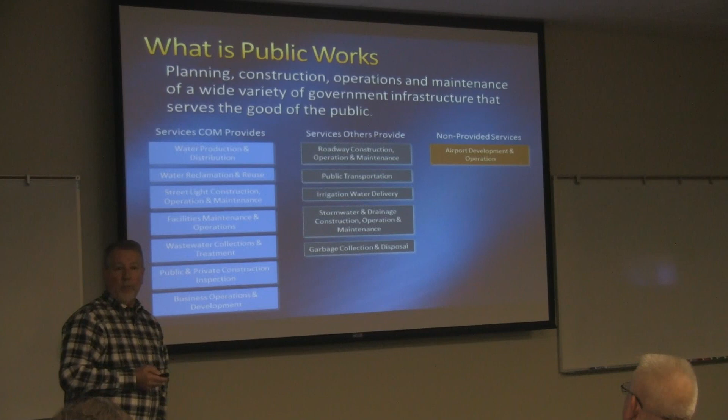In Ada County, we have a highway district that manages the roads. The Idaho Department of Transportation owns the highways and freeways, so we do not do that. We do not have an irrigation system—that's traditionally provided by irrigation agencies like Nampa Meridian Irrigation District, maybe Settlers or Pioneer. ACHD and ITD are responsible for stormwater in our community, so we don't have that. And as mentioned, the garbage collection. We also don't have an airport, but a lot of cities do. These are traditional public works responsibilities throughout the country.

Although we don't do those, we do a lot of coordination with the other agencies. In fact, we get a lot of calls and we want to assist citizens in getting them directed to the right agencies—highways, irrigation, public transportation, hazardous waste, school, animal control. We will happily direct you to those other services if we get those calls. Particularly as new members join our community from other areas, we may not offer the services they're traditionally used to. So a little bit about our department.

Here is a functional view of Public Works organization: policy management, performance management in the administration areas, our business operations team, which includes our environmental programs, all of the financial management, asset management, asset tracking—Alex will be able to share more of that with you. And then we have the responsibility of managing the facilities, like the one you're sitting in here. Any maintenance, repair, or upgrade needs, that responsibility falls within Public Works as well.

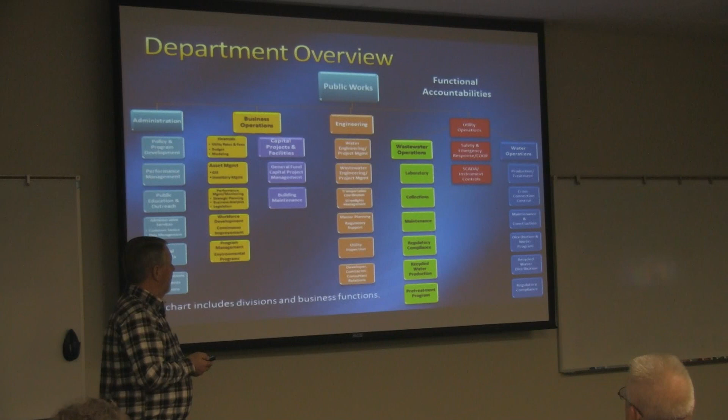In engineering, we have a wonderful staff of engineers designing, building, and managing infrastructure improvements both in our water and wastewater utilities, coordinating with transportation through ACHD and ITD, and master planning—looking out 10, 20, 30 years at how our city is growing and how we'll make sure we have those services available. That's all part of the engineering group. And then obviously our utility operations, which manages all of the day-to-day operations associated with delivering water to our city and sewer or wastewater back to the sewer facility.

So we have some unique demands on our time and expectations by the community. Certainly we are full-time—we do not stop 24/7. We need water delivered and we need sewer coming back, so we have to staff and manage accordingly. We have very expensive assets, probably now in the order of $400 to $500 million worth of assets throughout the city, serving you as wells and wastewater treatment plants, but also the tremendous amount of infrastructure in distribution of those services. So, very complex system, highly regulated, as it should be.

EPA, DEQ kind of define those requirements, ensuring that we are delivering safe products through our water and safe handling of wastewater. So very highly regulated. Our budget—about half of what the city receives comes to the Public Works Department. We'll talk a little bit more about that. As I mentioned, we have 107 FTEs, which puts us as the largest department in the city, and a very diverse and complex discipline. We have everything from engineers to scientists to administration to chemists to structural folks—it covers the gamut in terms of the professional disciplines, education, and training required to support operations like we have.

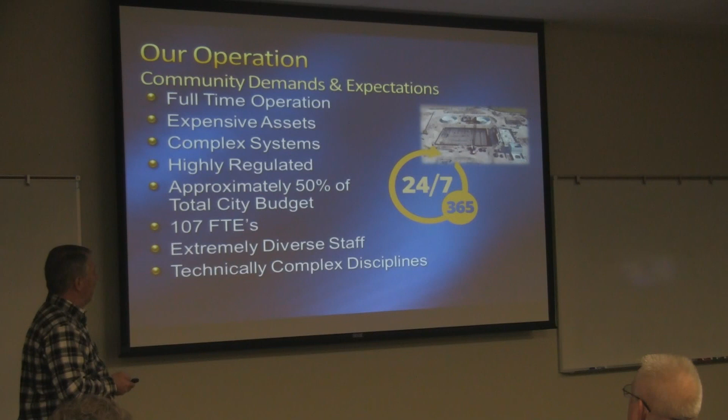Our source of funding comes from the enterprise fund, and that is in contrast to the general fund. Most of the other things you hear about within the city, fire, police, parks, all of that, those are general fund kinds of funded items. We live from the enterprise fund.

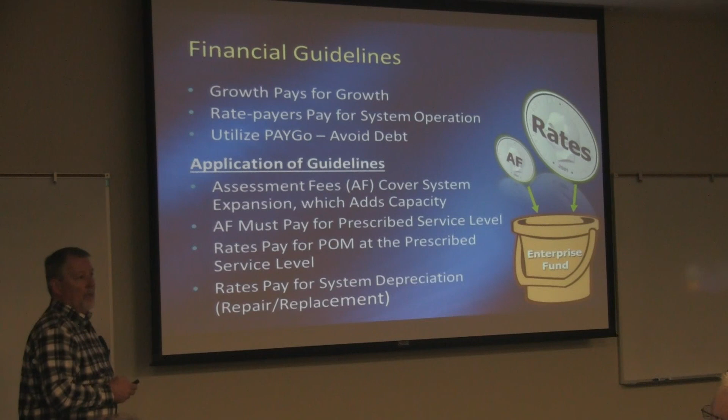With that, I'm going to stop and turn it over to Alex. We're going to walk through these basic divisions within our department and allow them to share the importance they contribute to the community. Thank you, Dale.

Good morning, everyone. My name is Alex Freitag. I am the manager of the business division in Public Works, and this is the team I have the privilege of working with. They're excellent in everything they do. As Dale mentioned, the business division is really there to support our utilities and engineering functions.

We run very much like a private sector business. The Public Works Department has its own revenue source. We provide a commodity to our customers. The ratepayers are our customers, and so we're able to operate very similar to the way a private sector business operates. My division handles a lot of those ancillary duties important to that. Dale talked about the financial piece of it.

We handle the budget for our entire department, which is in excess this year of $50 million, roughly about 50% of the overall city budget. We shepherd our entire group through the budget process, all of our divisions, through that planning process. It takes us probably about 6 months to go through the entire process from start to finish. The budgeting process is extensive.

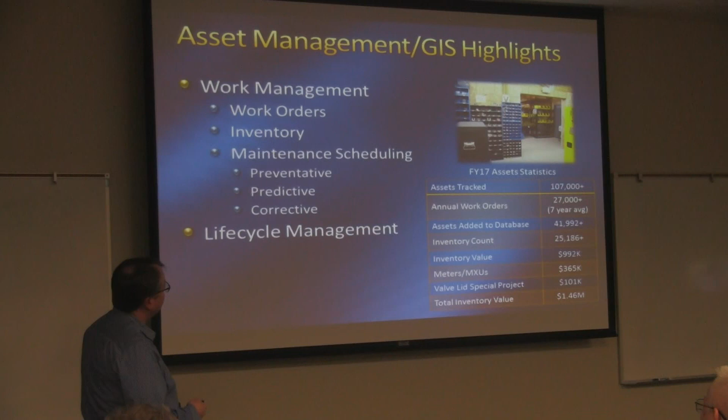The interesting thing about asset management is we've really only had a robust asset management plan in place for about 10 years. And as you can imagine, we've been putting infrastructure in the city for well over 100 years. So part of what they do is go back, capturing a lot of that stuff that was never categorized in the early days, and keeping up with the growth we have now. But yeah, we have some very old pipe in the ground, there's no question about that.

The final group I'll talk about for the Business Division is our capital projects and facilities team. In addition to all the work the Public Works group does with utilities and engineering, we are also responsible for the city facilities. Right now there's a team of 3 people that manage all 12 of those buildings, over 280,000 square feet. They do all the maintenance, the repairs, and a great chunk of the improvements, with just those 3 people handling that. There's one additional person, our capital projects person, who helps us with project management when we build new structures for the city and so on. So that's a busy group, I can tell you, they're always doing a lot of stuff.

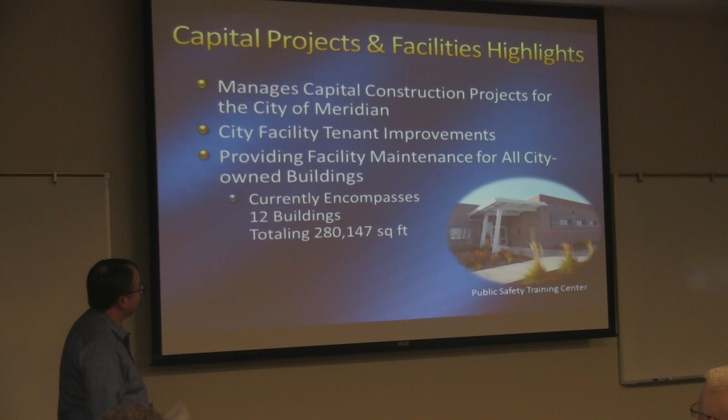So that's a quick, high-level look at the business division. And with that, I'll turn it over to Warren Stewart, our city engineer, and he's going to talk a bit about engineering.

So, excuse me, I have a cold, so if I'm a little froggy, excuse me. I'm going to talk briefly about some of the things that the engineering division, as well as the construction and inspection divisions, are responsible for, and highlight some of the projects we're currently doing.

One of the main things the engineering division gets heavily involved in, which has been mentioned already, is the long and short-term planning for the city of Meridian's utility infrastructure — that's water, sewer, recycled water, as well as, to some degree, transportation. As many of you may know, we don't have direct responsibility for the transportation infrastructure in the city of Meridian. We do have a liaison for the Public Works Department who advocates with ITD and ACHD to try and get the things the city would like to see incorporated into their projects, and to influence timing and so forth. But we don't have direct responsibility for that.

So a lot of this long-term planning, there are about 7 long-term master plans that we try and keep updated. About every 5 years we review and update those. A lot of the work regards water and wastewater and various aspects of that, from communication systems that allow us to remotely operate facilities, to the collection systems, distribution systems, and wastewater treatment plant.

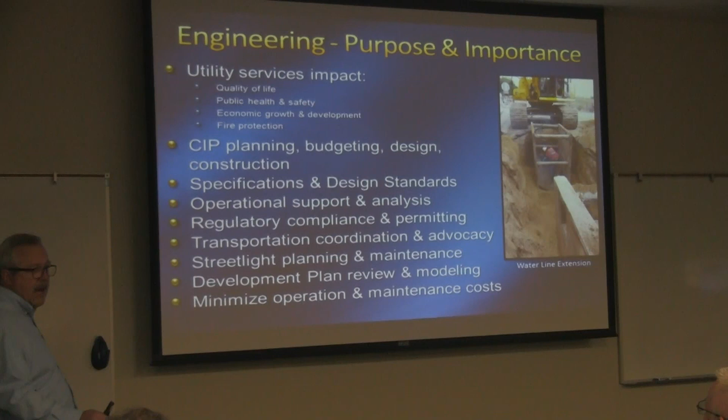The quality of our water and wastewater infrastructure directly impacts the quality of life of our citizens. It also has a significant impact on public health and safety, as well as our economic growth and development. The city has been growing, recognized several times as one of the fastest growing cities not only in the state of Idaho, but in the nation. So it's important that we keep ahead of that and make sure the quality of your water systems allows a high standard of life, while giving us the ability to accommodate growth and development.

One of the other things we try to look at regularly is regulatory compliance and permitting. Lorelei is responsible for the operational control of the NPDES permits, the EPA permits, and so forth that we have for our wastewater systems. But as the engineering division, we're constantly looking at the new regulatory landscape that's upcoming, as well as the existing regulatory landscape, and trying to anticipate those needs.

One reason we do that is to make sure that when we invest in new projects, we're not only trying to meet the immediate needs that are required, but looking out to address emerging needs, so that the infrastructure we put in the ground and the investments we make don't become prematurely obsolete, so they can serve us long term.

Again, I apologize. I get short of breath because I have a hard time breathing.

One of the other things we do in the engineering division is model all the new developments that come in. Anytime a new development comes into the city of Meridian, we run hydraulic models, which is a computer simulation of the water and wastewater systems they're proposing, to make sure we have adequate capacity. That also allows us the opportunity to place conditions of approval on these facilities or new developments that will ensure they build the infrastructure necessary and make the investments needed to support themselves.

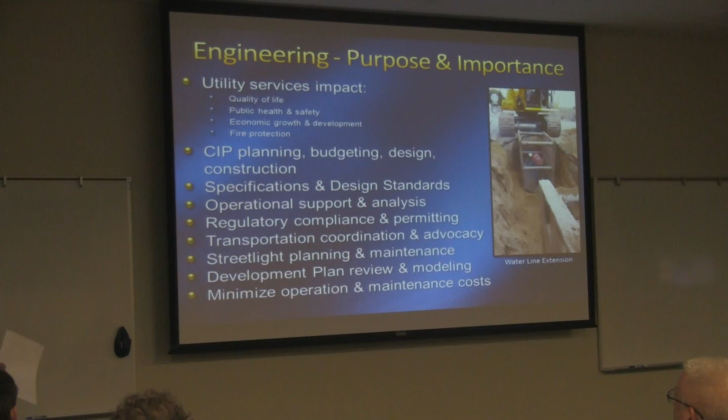One of the other things we look at a lot is a process where we're constantly looking at ways to improve efficiency in our operations, so that we can make sure all the investments we make make long-term financial sense for the city, and that we're doing that in the most cost-efficient method.

The other aspect I help oversee is the construction inspection piece of this. We have a group of inspectors that I oversee that inspects the utility infrastructure that goes in the ground. We have other inspectors that do electrical and plumbing and those kinds of things that work with the city, but we have a group dedicated to inspecting the water and wastewater facilities that go in the ground—not only the ones the city of Meridian puts in, but also all the infrastructure built by private developers, both commercial and residential, that ultimately comes to the city of Meridian for operation and ownership. The inspectors actually look at every project that goes in the ground.

They, however, aren't there all the time. There's so much work going on in the city of Meridian, and we have just a few inspectors who have to visit projects throughout the day, so they're not on a project all the time. But because they visit these projects regularly, it helps make sure the city's standards and specifications, as well as the state standards and specifications, are followed. We don't get to see them all the time, but I like to compare this simply to what police officers do.

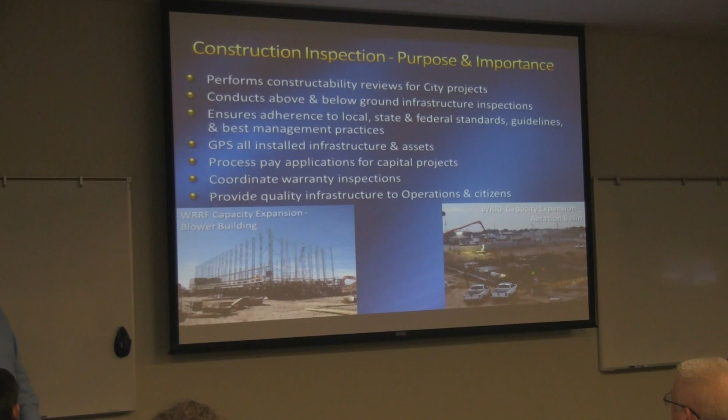They also help our engineering staff process pay applications for the contracts we're directly responsible for. We have a 2-year warranty program in the city of Meridian, so any new infrastructure that goes in the ground is required to have a 2-year warranty. They're also responsible for the 18-month inspection required on that warranty, making sure it gets done, and if corrections are needed, working with the contractor to make sure those corrections are taken care of. They're directly involved in making sure the quality of the infrastructure that goes into the ground is top-notch, so it has the longest life cycle possible.

I'll take just a few moments now to talk about some of the projects we have going on, and give you a sense of the scale.

The WRRF capacity expansion project—WRRF stands for Wastewater Resource Recovery Facility—is the largest project the city has ever done. We're essentially taking our existing treatment plant, rated at about 10 million gallons a day of capacity, and building onto it to raise that capacity to just over 15 million gallons a day, so we can accommodate the growth that's happening. But it's not only accommodating growth—it's also going to help us meet the new regulatory compliance issues and concerns coming to us in our new permits.

The next project is the Headworks reconstruction project. The Headworks is essentially the first piece of infrastructure the wastewater flows into at the plant. It has screens that screen out the most coarse things in the waste stream, and pumps that elevate the fluid to the clarifiers and other components inside the treatment plant. We're rebuilding it because it needs an upgrade for capacity, and we're also upgrading it so we can enclose it and recirculate the air through a filter to reduce the smell in the wastewater treatment plant, since the headworks is one of the largest contributors to that smell.

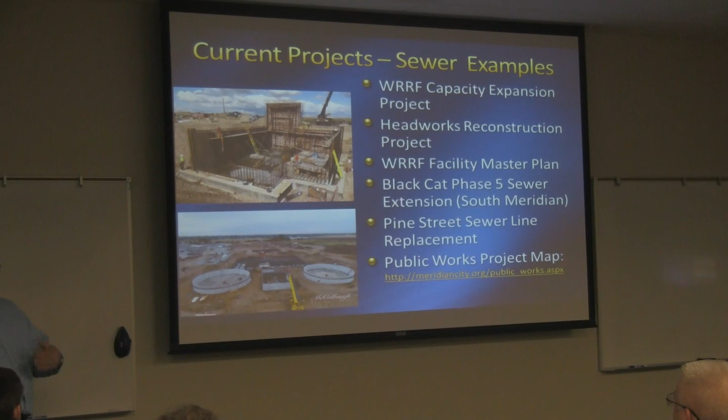Pine Street is a joint project with ACHD. They're widening Pine Street, and we team up with ACHD as often as we can on these projects because it saves citizens money—we don't have to pay for road repair since ACHD is already redoing the road. So we replace our infrastructure if it's old and needing replaced, at the same time ACHD does these roadway projects. We're replacing water and sewer line in conjunction with the Pine Street project to save citizens money and repair some of the aging infrastructure there.

The Public Works project mapping shown at the bottom highlights that Susie talked to our city council last night about a new tool on our website—an interactive map you can click on. It shows all the projects currently active as well as future projects. You can click on them to get information, and you can even search by neighborhood, so if you want to see what projects are going on in the city of Meridian, that's a place you can do that.

Finally, I'll talk about some of the water projects. We're currently reconstructing Well 15. One challenge here in the city of Meridian is that we have a prolific aquifer, but it has lots of sub-aquifers—a layer of gravels with a lot of water, then a layer of clay, then another layer of gravel and clay. Each of those little aquifers has very different water chemistry. As we go down from one aquifer to another, we're trying to find the areas with the best water chemistry—the upper aquifer has certain challenges, the lower aquifers have different challenges, but we're trying to find that sweet spot.

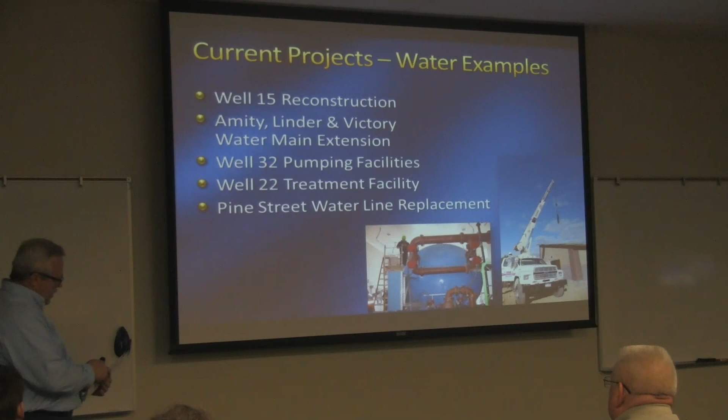I just got you some water. Thank you. Oh, okay, thank you. I know, I'm kind of nervous about touching this. Sorry.

Well, you guys are sure troopers. I know you've sat through a lot of information, so I appreciate it, and hopefully we'll make this section pretty exciting. I get excited about it.

The people that run these two groups that provide the water and sewer are some really, really great people that work really hard day in and day out.

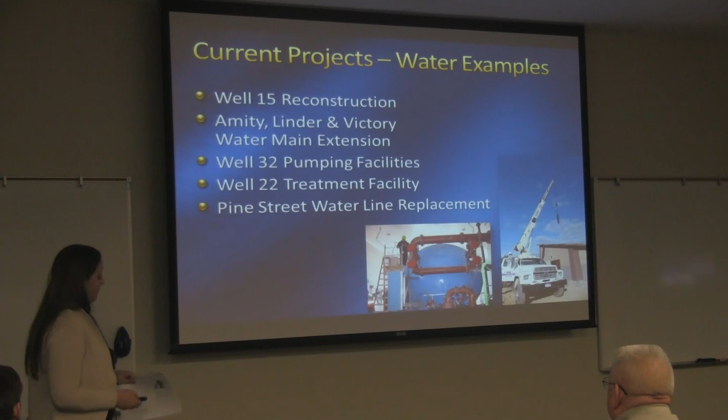Okay, so to kick it off, because everybody likes videos, I have some videos that we developed that kind of explain what water and wastewater is. These are really great if you have little kids at home or grandkids and they want to know about the water system. So these are available on our website too. So we'll kick it off with these.

Son, you showered yet? Come on, sis. Come on, hurry up. Dad wants me to get going. Hey, do you know where Meridian's water comes from?

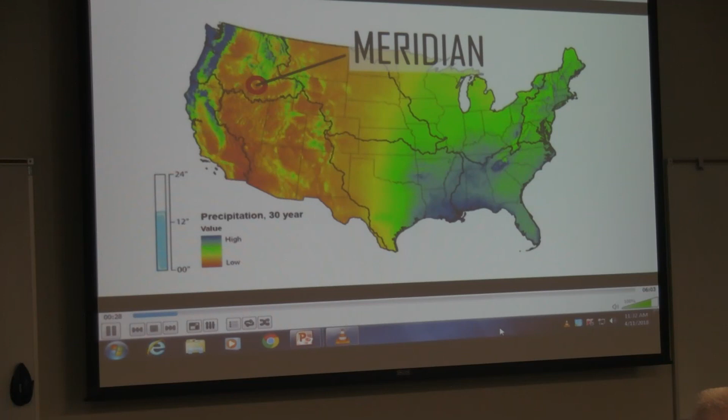Doesn't our water come from rain and snow? Yeah, rain and snow. Well, kind of. The city of Meridian has a dry climate. We only get about 14 inches of rain a year. However, snow in the nearby mountains melts and flows into our rivers and streams. From there, the water seeps deep into the ground into what's called an aquifer.

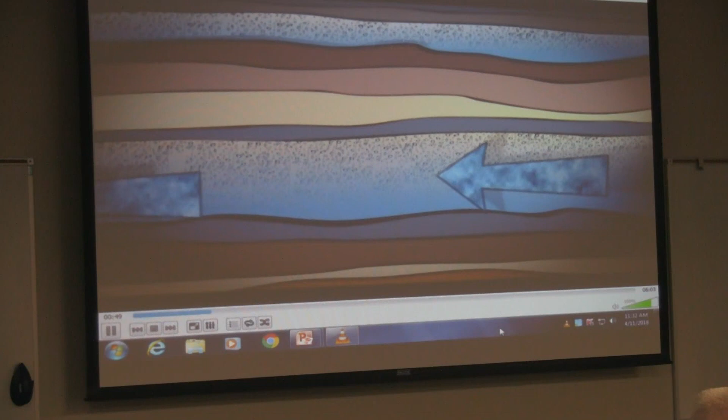What's an aquifer? An aquifer is a geological formation of permeable rock, gravel, or sand that contains water deep underground and flows like a slow underground river. Fortunately, beneath the city of Meridian, there are several aquifers that supply water for our residents.

What? So there's more than one aquifer? And they're deep in the ground? So how do we get our water out? By drilling wells. Deciding where to drill and how deep to drill is really important.

Different aquifers are at different depths and have different water quality depending on the geological formation they're in. The city's water division conducts well testing to find the best location to drill a well and to test the groundwater quality that comes from each well. The wells have to pass a test? Not like that, silly. Like this.

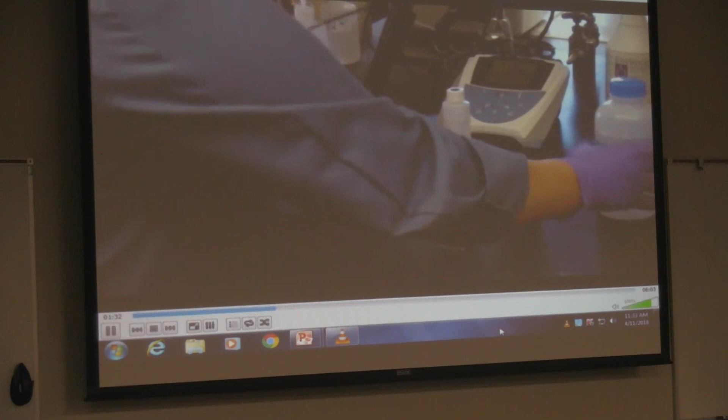When a test well indicates sufficient flow and high water quality, we put in what we call a production well. This well produces drinking water to our homes, schools, and businesses.

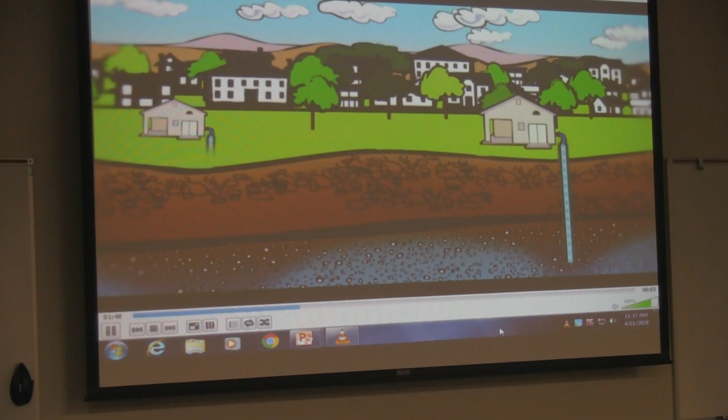You know, we're really lucky in Meridian because our aquifer has really good water quality. And as a result, we don't have to treat it as much as we would, say, if we drew our water from local rivers. So, my friend who lives on the other side of town, she drinks the same water I do?

Not necessarily. There are 20 active wells located all around Meridian. Each well services different zones in our city. Your neighborhood might get its water from a well in one zone, and your friend from a well in another zone. Hey, my boss complained to me the other day about his water being a little brown last week. What's up with that?

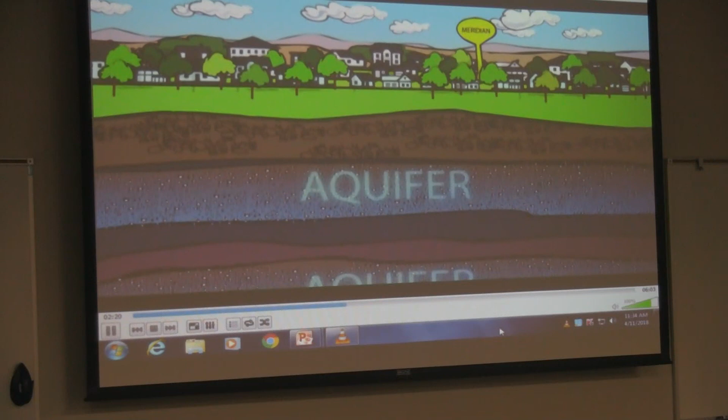Different aquifers have different levels of naturally occurring minerals, such as iron and manganese. Occasionally, you may notice that your water is slightly discolored in appearance.

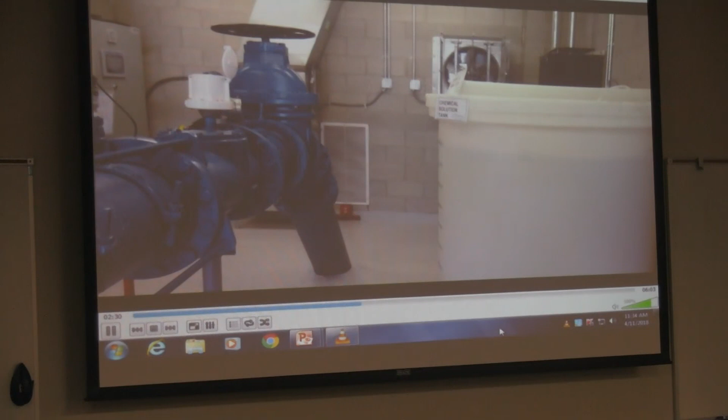Meridian's water division adds a small amount of chlorine to disinfect all the drinking water we produce. When the chlorine mixes with water containing certain minerals, a chemical reaction causes them to oxidize, become heavier, and settle to the bottom of water lines. During times of high water demand, such as mornings and evenings, this mineral buildup gets picked up and mixed back into the water flow, causing the water to appear brown in color.

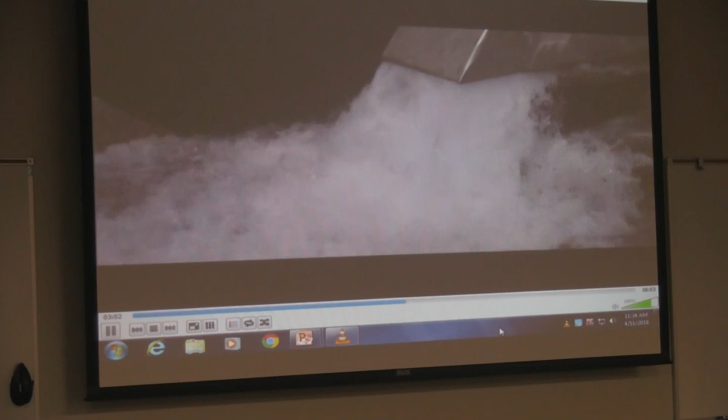The water division operates a year-round flushing program to help clear out the buildup of iron and manganese. The city is also pursuing long-term solutions by constructing new water filtration facilities, which will reduce these harmless minerals and help keep our drinking water clear.

A portion of the drinking water also goes to storage tanks or reservoirs for future use in emergencies.

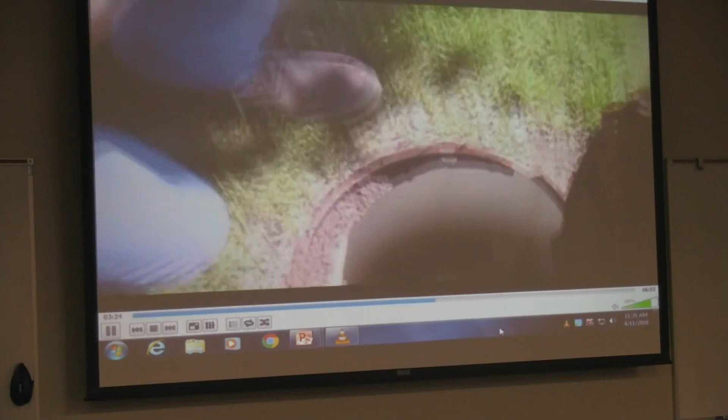Since water meters were first installed, the city has collected data about how much water your home uses. But how we collect data has evolved over time. With the help of laptops and wireless technology, we now drive through neighborhoods and get hundreds of meter readings at a time. This is one way the city is improving efficiency and saving money. Decades of collecting water usage data has enabled the city to see trends in consumption over the years.

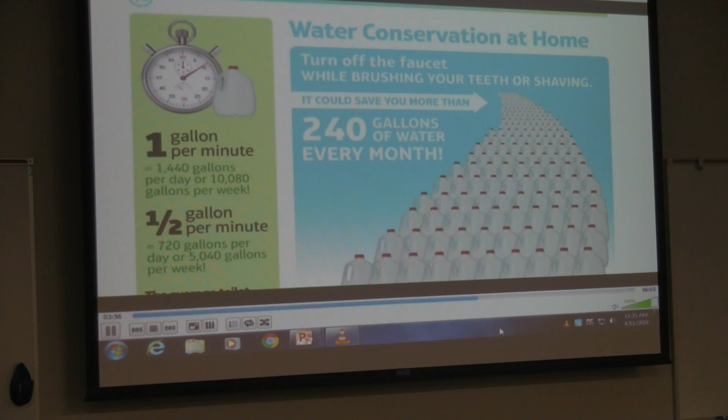Hey, turn off the water while you're doing that. Oh no! That was a good example. Let's look at some others.

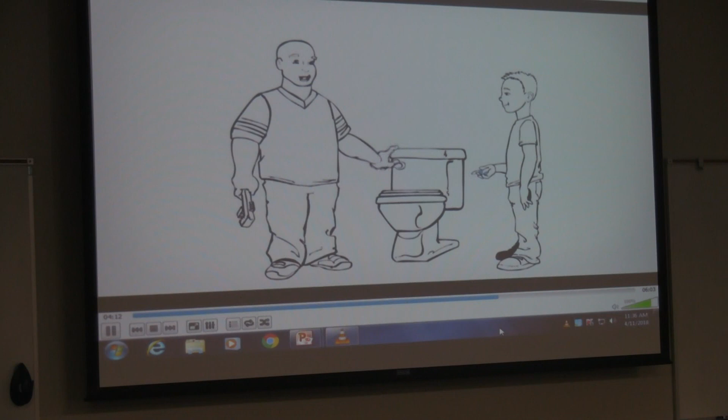Thanks for helping me fix the leaky toilets out. Hey, let's use the blue tablets on the other toilets to see if they leak too. Sure was nice of the city to give these to us for free. That keeps us from wasting water and saves us money. This low-flow faucet will help reduce how much water you use too. That's right, changing this out was a great suggestion.

When you're out enjoying Meridian's parks, make use of our filling stations with a reusable bottle. There's a lot of ways to conserve water. Here are some suggestions.

You know what, Dad? Let me sweep the driveway off instead of hosing it off with the city water. We don't want all the oily gunk getting into the aquifer. Good thinking, buddy. It's pretty easy to protect our water quality once we start thinking about it. Little actions make a big difference.

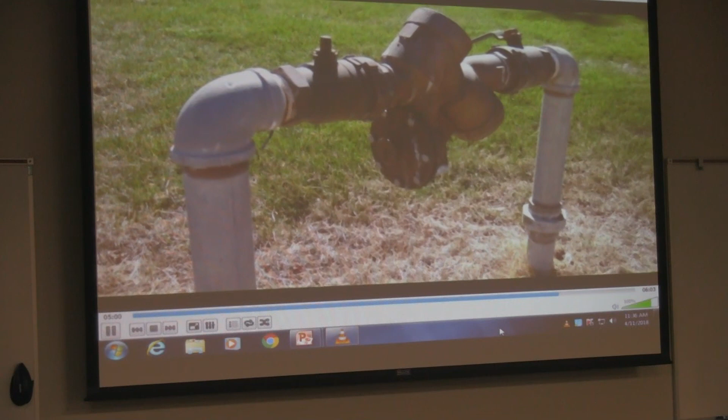Help us protect and conserve Meridian's water by installing backflow prevention devices, properly disposing of household hazardous waste, and picking up pet waste. Did you know taking shorter showers can save hundreds of gallons of water?

But I think I could take shorter showers once in a while. Here's the timer. Let's see how long you take. Ha! I don't need to take a shower. Yes, you do.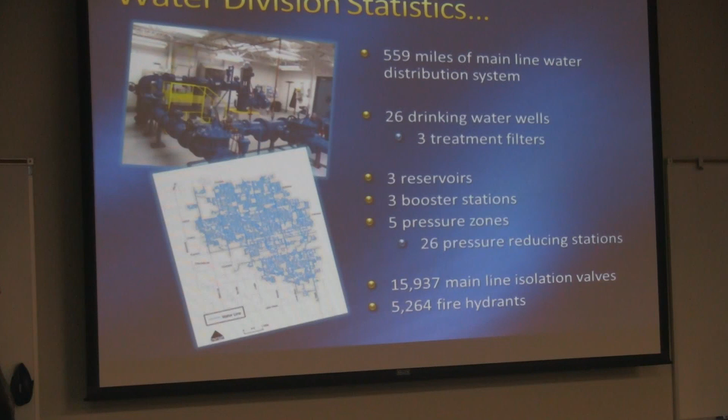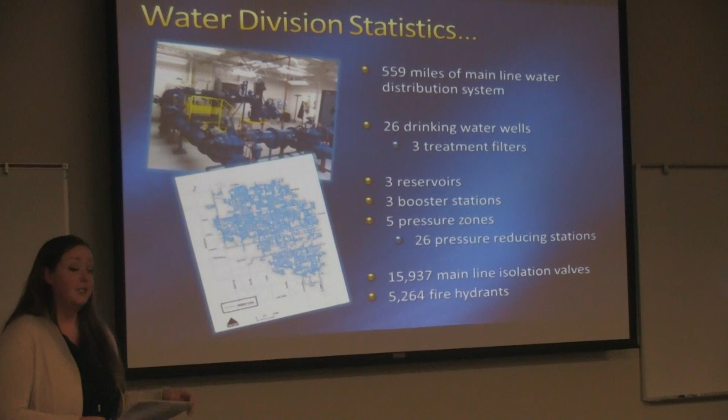Okay, perfect. So that was a great video that kind of showed you where we get our water from. But then our next big job is, like Warren talked about, pumping the water up from the aquifer and then distributing it to all houses in Meridian. So we have over 550 miles of water line that we're responsible for.

Since that video, this shows you how fast Meridian's growing. It said we have 20 wells, we're actually up to 26 wells now, and 3 of those have those treatment facilities that Warren spoke about that help remove that discoloration. We have 3 reservoirs that store the water.

One of the big jobs that we do is we have to have enough water demand so that when everybody wakes up in the morning, the faucets all turn on at the same pressure, and when everybody gets home from work, the faucets turn on. But also, if there were a fire to happen during that time, we have to make sure we have enough water to also be able to open a hydrant and provide water for that fire. So some of these big reservoirs, the water tower, there's one at Settlers Park, a big above ground tank, those help us store water for those high peak demands.

We have almost 16,000 isolation valves. So when you drive down the street, you'll see two things that are ours. You'll see kind of big manholes that are like the size of an extra large pizza - those are for the sewer system. You'll also see some that are about this big that are for the water system. So next time you drive down the road, just keep an eye out for those.

Each time the sewer or water main lines change direction, we have one of those valves at our manholes so that we can have some control over where the water is going. A good example: you may have heard in the news when we accidentally shut down Eagle Road a little bit ago. Sorry. But one of the great things is because of all of those isolation valves, we didn't have a single customer out of water for that whole event because we were able to shut those off and just take care of that problem right there. So a big part of our job is maintaining all of those valves and fire hydrants around the city.

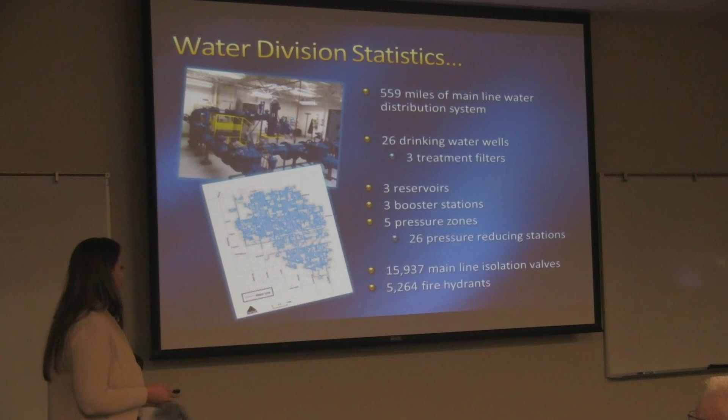Geez, I'm not good at this.

So the fire hydrants are supplied by just regular drinking water? They are, yeah. Our biggest goal in the water department is to provide safe, healthy drinking water to the citizens for use, but also for fire protection, which we talked about. As Dale mentioned, we are very, very highly regulated, so we do testing all the time to ensure that our water meets federal and state requirements.

And to do that, we also have, the video talked a little bit about backflow preventers. What that is: when your water system is connected to a different type of water, like maybe irrigation, we want to make sure there's absolutely no way that irrigation water could get back into the drinking water. So you have to put one of those backflow devices in, which is essentially a one-way thing, so it can only go one way and we're protected from the other sources of water.

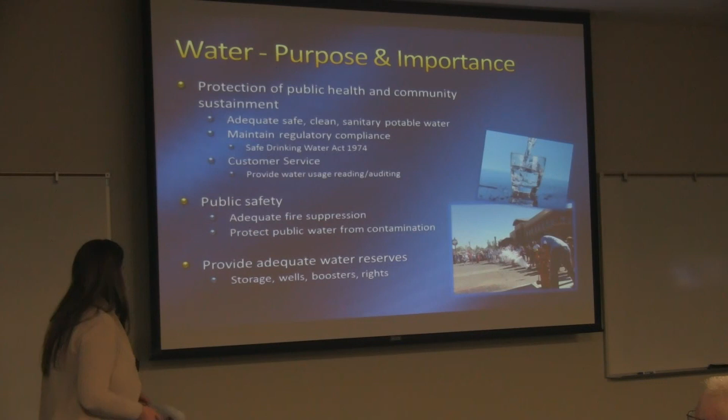Our water division has 26 employees, broken into 4 different sections. These guys are led by our water superintendent, Dennis Teller.

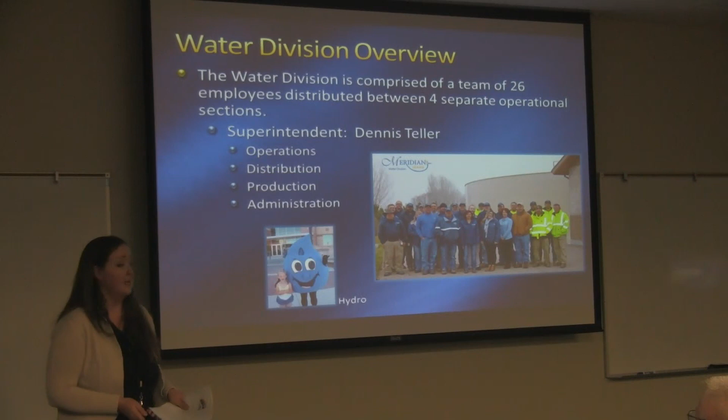We have our water operations section. These guys are really our customer-facing people. They are responsible for reading the 34,000 water meters every month to ensure those meters are accurate so that the bills we send out are accurate. That's a really big deal for us. These guys go out and check about 17,000 different checks per year to make sure those meters are reading correctly. If someone thinks their water meter might not be working right, these are the guys that go out and check those for people. We also get the not-fun job of shutting off and turning on water when bills don't get paid. So that's something these guys do.

These meters also run on batteries, so they run out of life eventually. They're on a 15-year replacement cycle, so every year our guys go out and replace about 3,000 old meters with new meters.

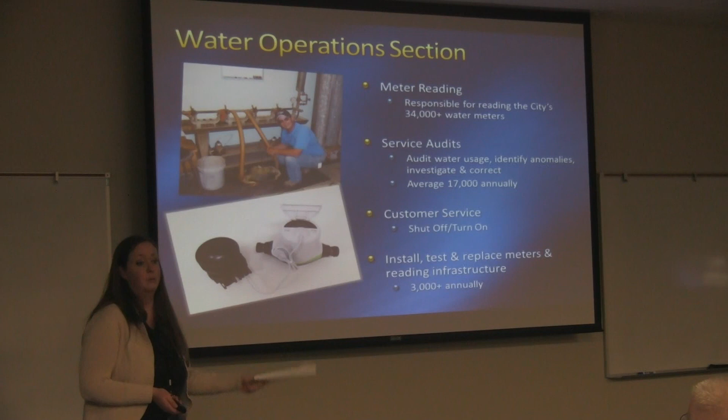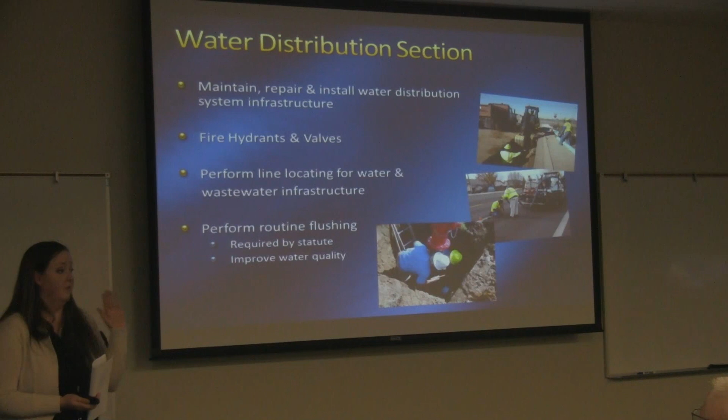Our distribution section is responsible for all of the main lines out in the street. These guys are able to repair small breaks. They go out and check all of those valves and hydrants. It's our goal to touch every single one of those at least once every 5 years to make sure they work and are functioning, and do any repairs on them. These are also the guys that do the routine flushing the video talked about. We're required by the state to flush our water lines twice per year, and these guys do that. So we flush every single line in the city twice per year. If you're interested in getting on our flushing notice list, you can also sign up for that, I believe, on the website as well.

Our final water section is responsible for the actual production and treatment. These guys run the treatment facilities that remove those little scuba-diver-looking organisms. They're also responsible for all of the testing required by DEQ, so we have to send in every test we do to DEQ so they can check and make sure the water is safe. These guys also track all of the backflow assemblies - surprisingly, we have over 10,000 of these backflow assemblies protecting the water system.

So now if we jump over to the other side of water, we have another video that briefly describes the wastewater side.

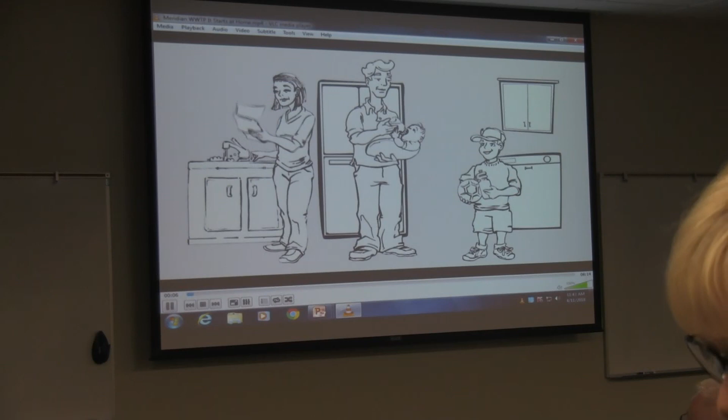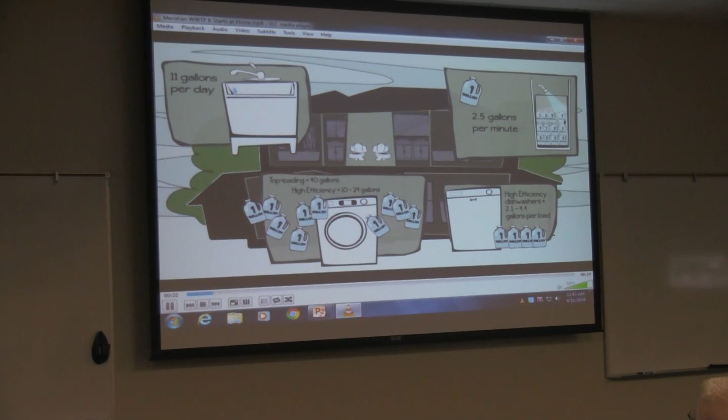Every month I pay this wastewater bill. I wonder what it actually pays for. Have you ever thought about how much water your household uses each day? All the water from sinks, fixtures, and appliances leave your house and enter the city's collection system. Did you know that we generate millions of gallons of wastewater a day? So where does it go?

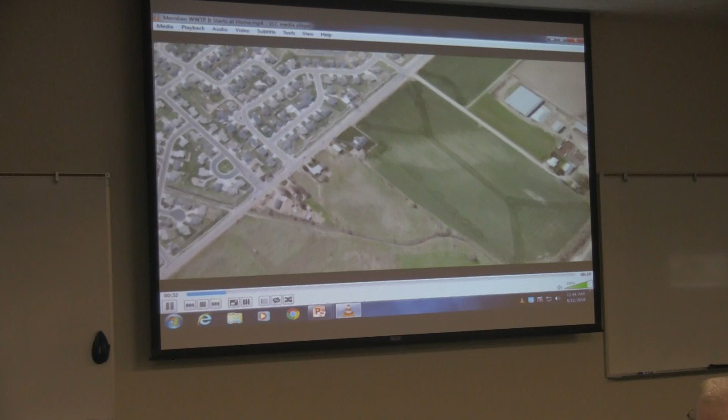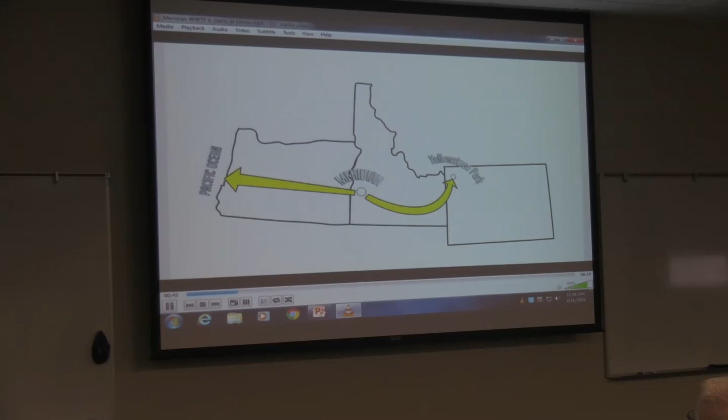Meridian has hundreds of miles of pipeline that move wastewater from your houses and businesses to a central treatment plant. All of the pipes laid end to end would stretch from Meridian to the Pacific Ocean or to Yellowstone National Park. Wastewater enters small pipes as it leaves your house, and the size of the pipe increases as more and more houses are added into the collection system. These pipes move a lot of wastewater.

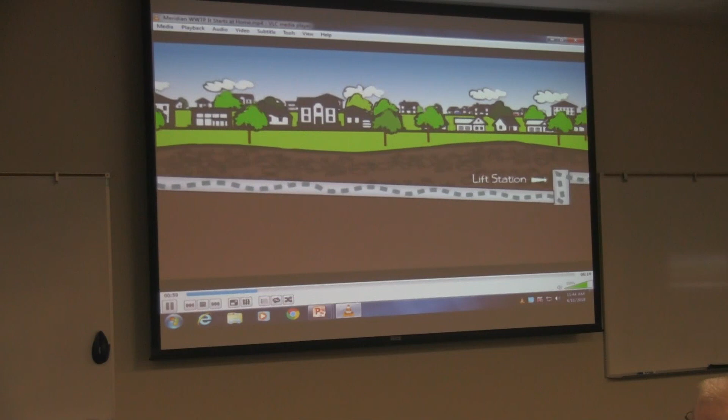Wastewater flows primarily from your house to the treatment plant with the help of gravity. Every now and then, the lift station pumps the flow up so it can resume flowing by gravity again. There are more than 10 lift stations throughout our collection system.

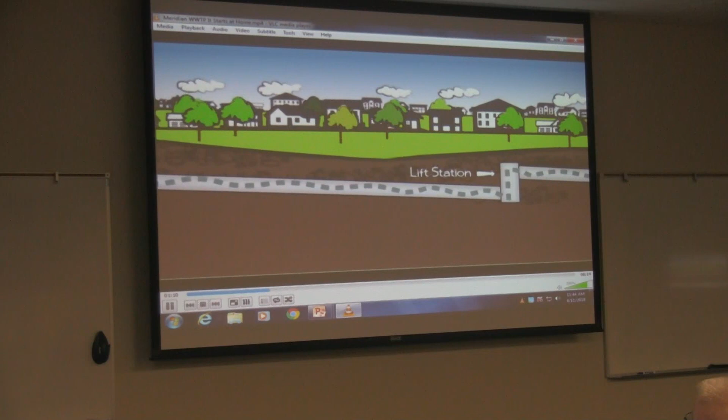When the wastewater gets to the treatment plant, we use an intricate balance of physical, biological, and chemical processes to treat or clean the wastewater before it goes back into 5 Mile Creek and eventually the Boise River. Let's take a quick tour of the plant. We treat the wastewater in 6 steps.

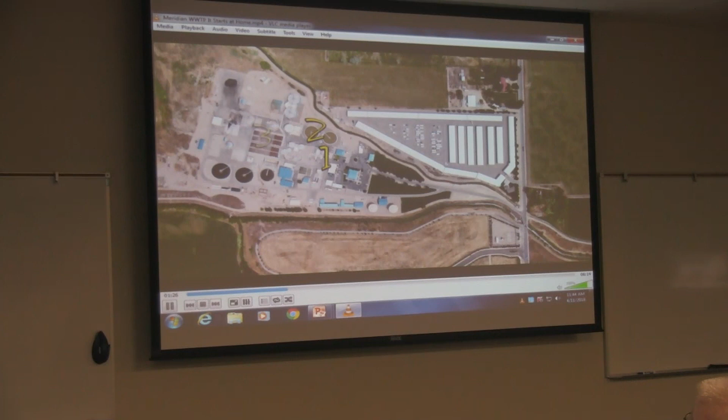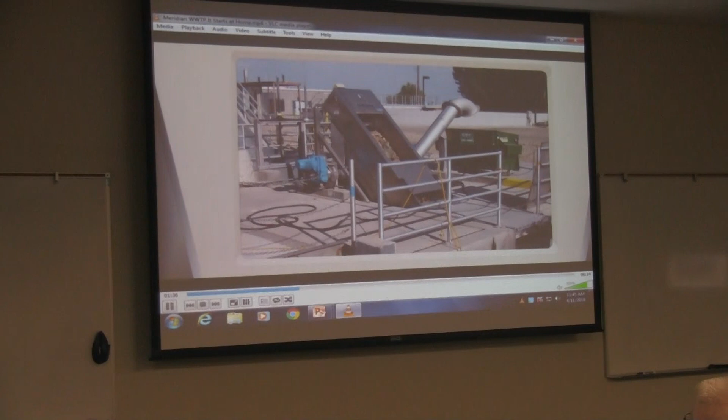The front door of the treatment plant is called the headworks, where large solids are removed. Unfortunately, we often find things like diapers, wipes, rags, and other types of trash that should never have been flushed down the toilet. A 1/4-inch diameter screen allows natural solids to pass through for separate treatment.

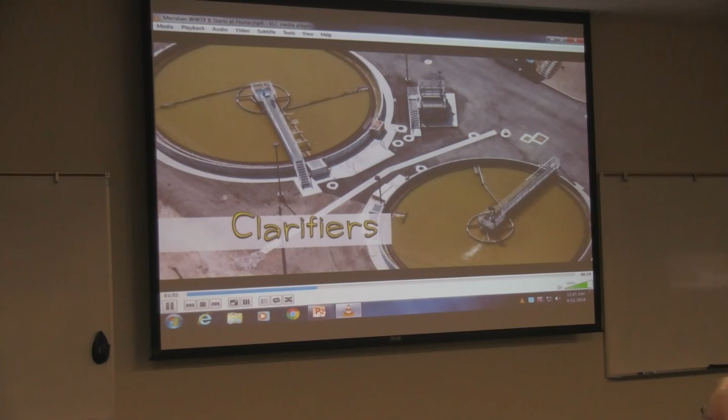The next step is primary treatment, where two 80-foot diameter clarifiers go to work. Think of these clarifiers as a wide spot in a stream where the flow of the wastewater slows way down, so solids can settle to the bottom of the tank for removal, and floating materials such as oil and grease can be skimmed off the top.

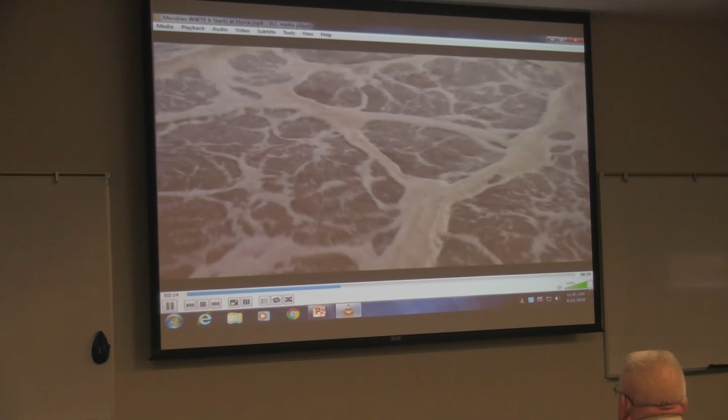The third step starts in the aeration basins, where air is pumped into the wastewater at varying levels in order to grow bacteria which eat the stuff we're actually trying to get rid of. We love these wastewater bugs. These helpful bacteria provide the biological processing for us, removing water pollutants. What's great about the City of Meridian's process is that we remove most of the waste without any chemicals, which is better for our environment.

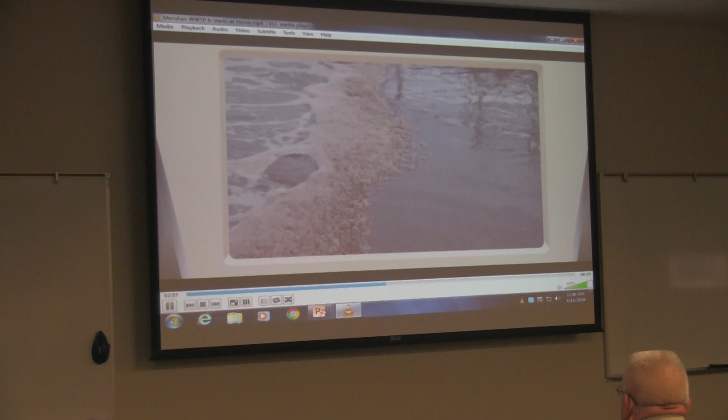At Meridian's wastewater treatment plant, we have aeration basins which together hold millions of gallons of water. That's a lot of water. Next, the leftovers from the first hungry bacteria enter the aerobic zone, where oxygen is added to the water so that a different kind of bacteria can get to work. In this zone, you can see all the bubbles we're making.

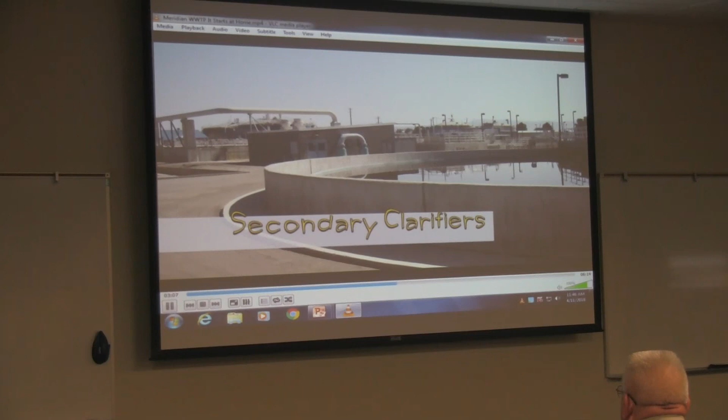Step 4 in this process is the secondary clarifiers. They work like the primary clarifiers, a wide spot in the stream where, again, solids settle out and floating material can be skimmed off the surface.

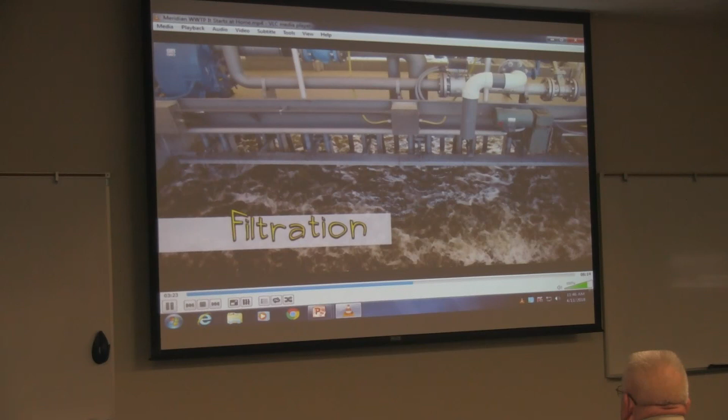The 5th step is the filtration process, or what we call tertiary treatment. Now we're removing very small pollutants using cloth media filters about 1/10 the diameter of a human hair.

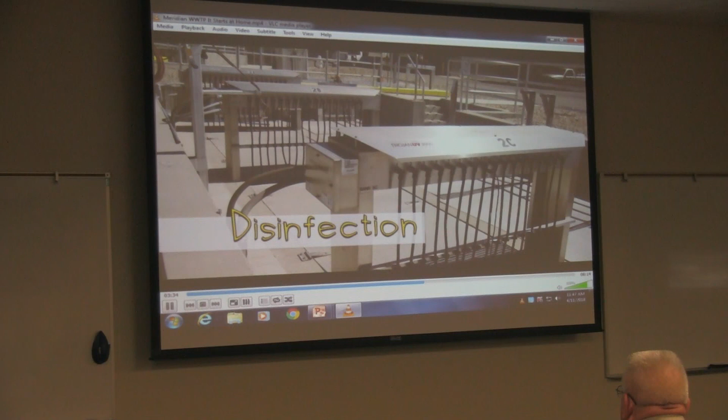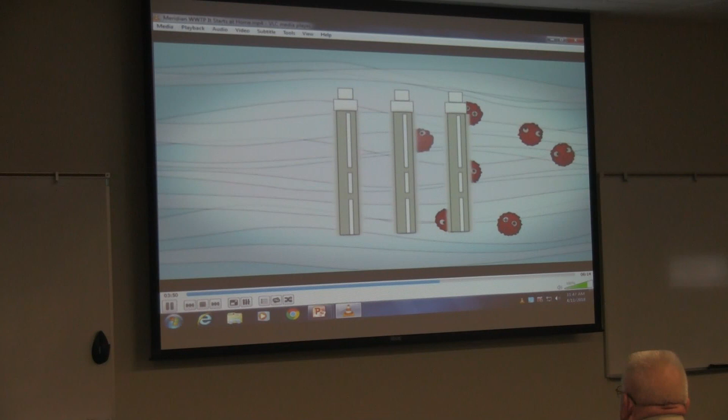Our 6th and final liquid treatment step is critical. One of the most significant threats to human health is waterborne pathogens, so it's critical to disinfect the water before sending it to the river. Water is disinfected using ultraviolet light. The water is sent through UV lamps, kind of like what you see in tanning booths, only way stronger. The UV light inactivates the bacteria that are left in the water before we discharge it.

Some of the treated water is recycled and reused in the city. The City of Meridian has the first Class A citywide recycled water permit in the entire state of Idaho. We are permitted to use recycled water for irrigation, fire suppression, toilet flushing, and other commercial uses. Water that isn't recycled is discharged to 5 Mile Creek.

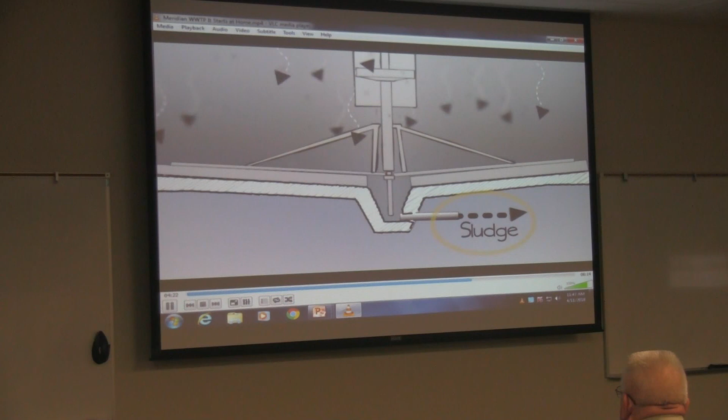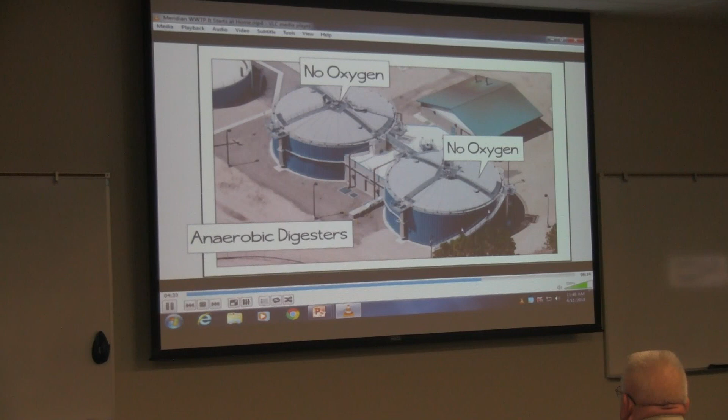Do you remember those solids we removed from the wastewater in the early process at the treatment plant? The solids treatment includes removing moisture from the organic material to reduce the volume of waste. Solids are treated in digesters where it is heated to break down the organic material. Once that is finished, the remaining solids are called biosolids, which are quite dry and can be used as a soil amendment. The gas that is produced in the digester, where the solid treatment happens, is used to heat the digester and provides energy at the plant, saving money on natural gas.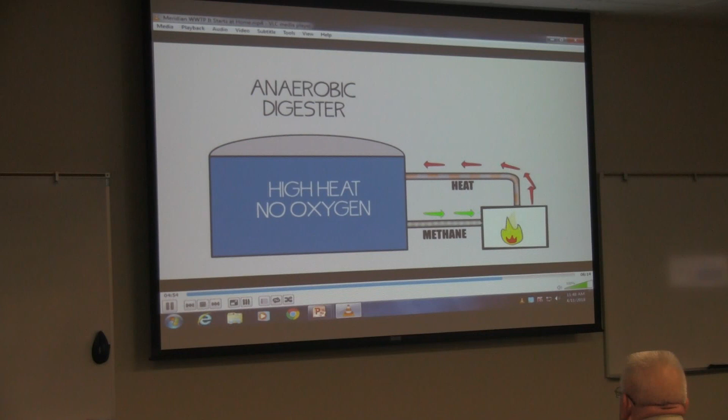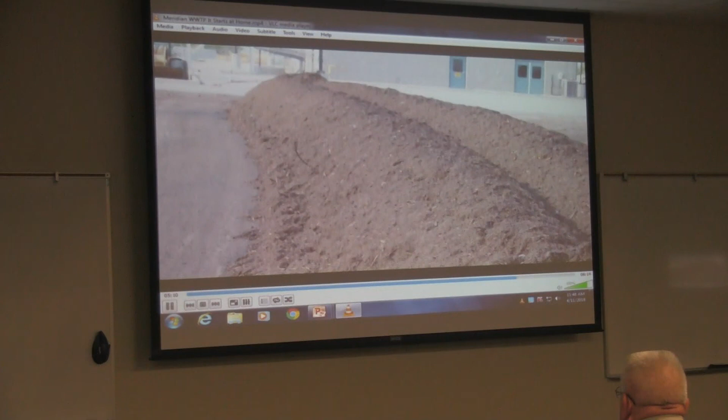Biosolids that are not beneficially reused are trucked to the landfill for disposal. In order to get more value from all the processes at the treatment plant, the City of Meridian continues to conduct pilot programs such as biosolids composting so the product may be put to good use.

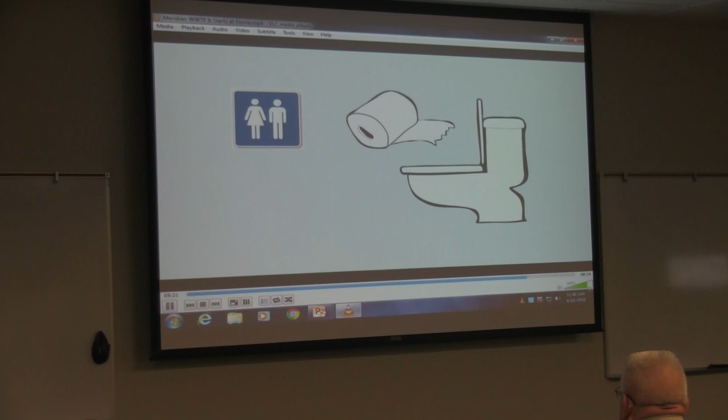So that's where my money goes when I pay my wastewater bill.

Oh, I can work it now. All right, so that's another great video that shows you kind of the wastewater process. It's a really fascinating process.

So our job on the wastewater side is to take all of that water. Just like the water side had the water to get to your house, the collection system takes all of the water from your house. So we have over 430 miles of pipe and 9 lift stations that lift the wastewater back up so it can flow by gravity, and close to 12,000 manholes, those big pizza-sized ones, which all come to our main wastewater treatment facility. That's out on 10 Mile Road, if you've ever driven past out there. And our plant is rated to treat 10.2 million gallons per day, and we actually now get up close to almost 8 million gallons that come to that plant every single day.

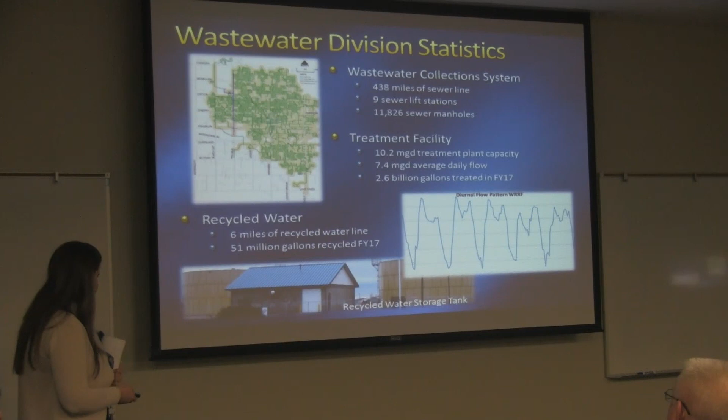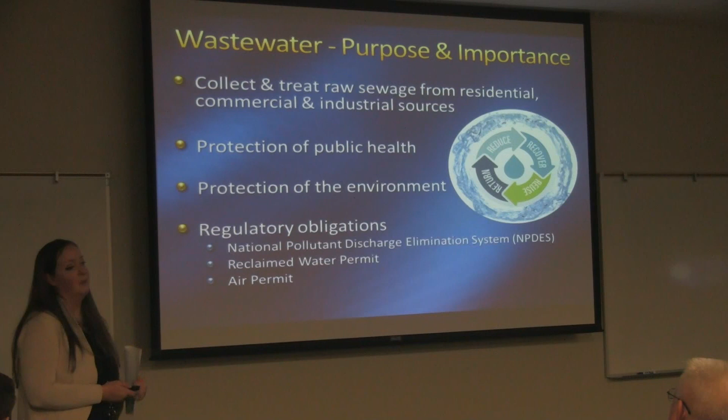On the wastewater side, our main goal is to protect public health and the environment. So we are also really heavily regulated as to what we put out into the creek. We have 3 different permits that we operate under at that facility: a permit issued by the EPA, a permit issued by the state, and we actually have a state-issued air permit as well. So our job is basically making sure we meet all of those requirements.

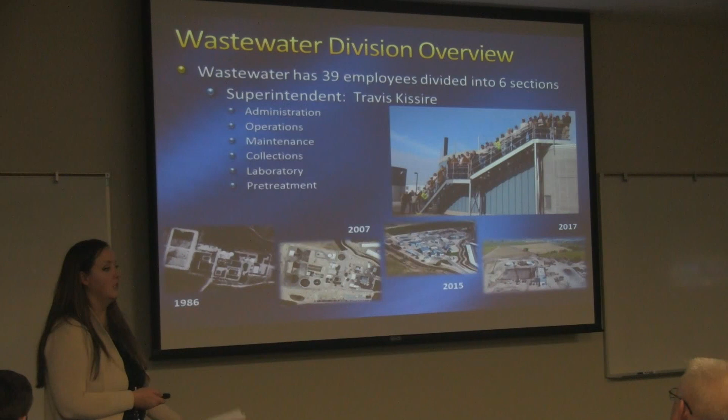The wastewater division has 39 employees, and we've been out on the site at 10 Mile since the late 70s, so that site has been expanded ever since. You can kind of see just like that big growth in Meridian, the plant has done the same thing to keep up with that growth.

Our operations and maintenance section, these guys do some incredible work. They also do some work on some really gross things. You'll see one of our mechanics down there on the left. The flushable wipes are a big deal for us. They say flushable, but they end up getting caught in pumps and in our lift stations and at our treatment plant, causing big blockages that we have to go and remove.

So we're not a fan of flushable wipes, but our facility has to operate 24/7 every single day. The flow never ever stops. In fact, I have about 1 hour if the power goes out at my facility before wastewater is overflowing. So we have a lot of redundancy built in to make sure that we never ever shut down.

Do you want to have backup power? We do, but sometimes the main power and backup power doesn't work. That's a bad day for me.

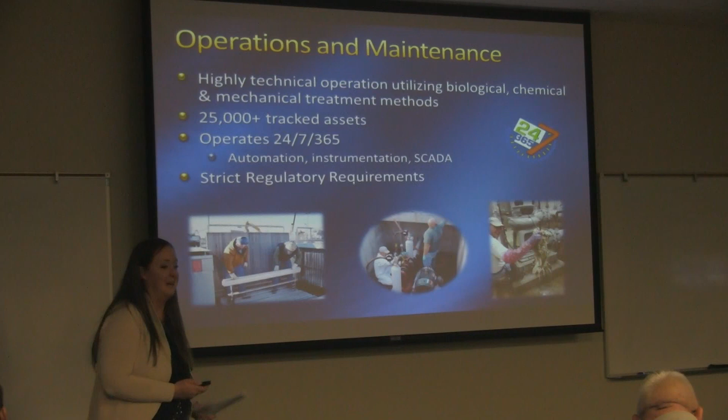So our other group is the collections group. These guys take care of all the lines out in the city, getting the wastewater to the plant. You may have seen some of our big trucks, we have 2 of them out there. Our goal is to clean every single sewer line in Meridian once every 3 years and TV it once every 5 years, so we actually have a camera that drives through the sewer.

Some of the interesting things they sometimes find are mice that get into it, but those are exciting. Alligators. Yeah, alligators.

But one of the big things we do is we look for infiltration. The groundwater level in Meridian is pretty high, so if we get any crack in our system, groundwater just enters our system, and that's all extra flow coming to the treatment plant that we don't really need to treat. So a big job our guys do is find that infiltration and stop it. To date, they've stopped more than 1 million gallons per day of groundwater coming into our system. That's great because it saves the capacity for what we actually need it for, which is population growth and sewer usage.

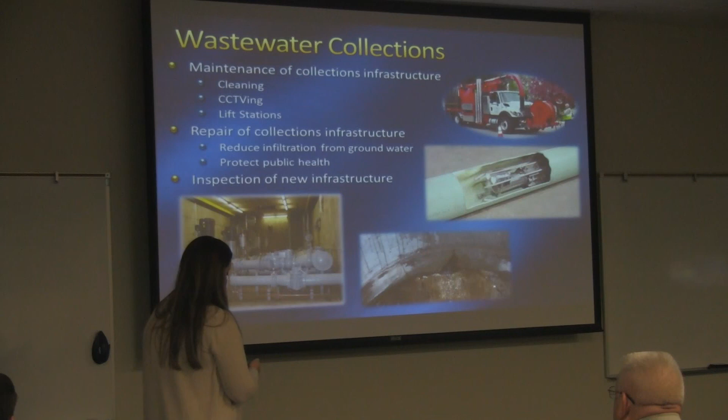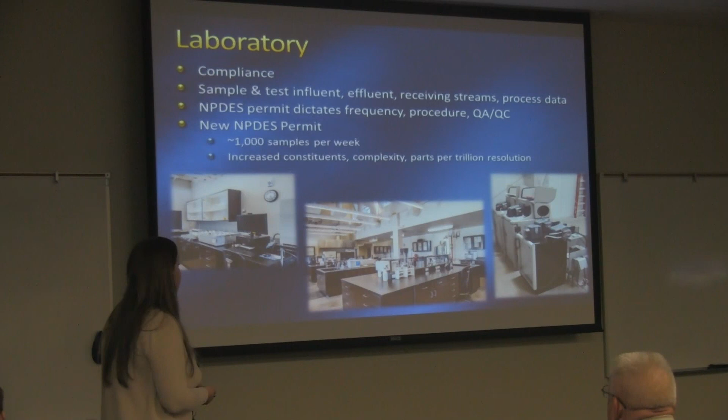We also have a state-of-the-art laboratory. These guys are required to test what comes into the plant, what leaves the plant, and a lot of steps in between. This is how we show our compliance with the state regulators and the EPA.

We also have a pre-treatment group. We have over 2,000 businesses in Meridian, and we really care about what those businesses are hooking up and dumping into our sewers. So these pre-treatment guys go out and monitor restaurants, dentists, auto shops, anything with a potential to send us something kind of bad down the sewer. They make sure businesses understand best management practices, and also look at any new businesses coming to Meridian to make sure they're not hooking something to our system that could cause harm.

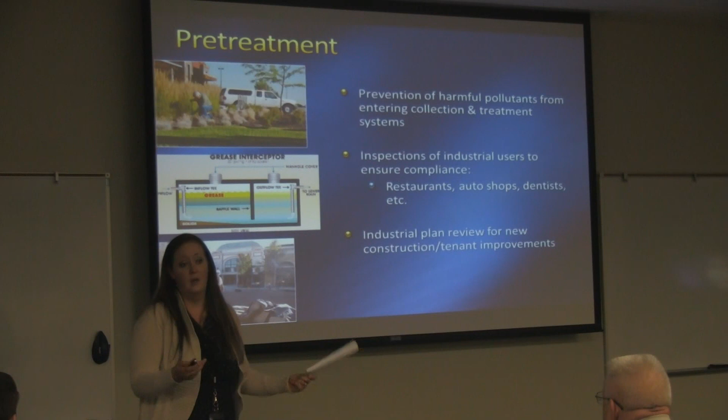And with that, I'm going to turn it back over to Dale, who will talk about a few more ways that you can get involved with public works.

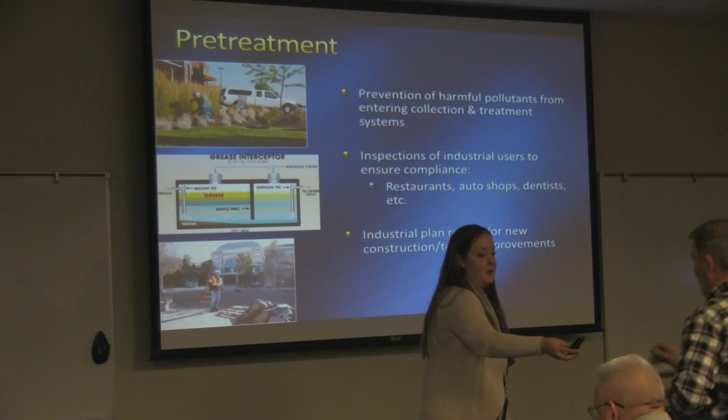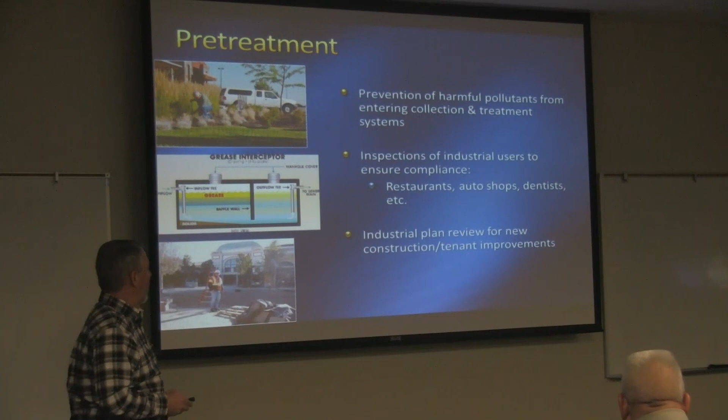Thank you, Lorelei. So as you can see, we've got a lot of things going on, and a lot of professionals serving the community day in, day out throughout the year. We have some really neat opportunities for you to learn more about Public Works.

We are entering our 10th annual Public Works Week this year. It's being held June 4th through the 8th. This is something that's out in front.

Our two primary activities that I think would really pique your interest are the Go With The Flow tour, typically in the evening, where we give you a chance. We meet at City Hall, we have a bus service, and we take you around to physically see a lot of these facilities, from wells and treatment facilities on the water side to the wastewater plant and one of our state-of-the-art lift stations, as well as a lot of other great informational booths and activities at City Plaza in front of City Hall.

So I really encourage you to take a look at this and join us if you get a chance. It's a wonderful opportunity to learn more.

You'll even meet our mascots, so you gotta have a mascot, right? They're there entertaining kids and adults alike.